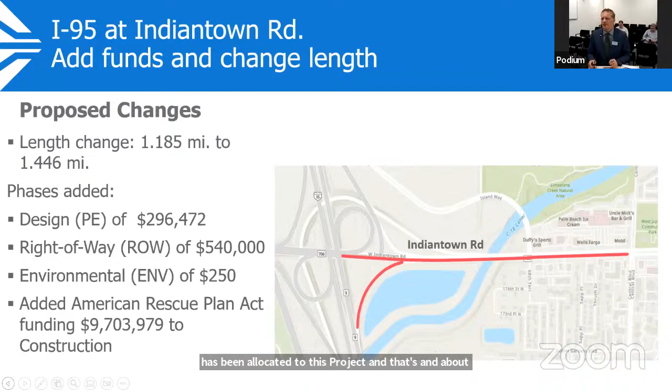In this project, they're adding funds and changing the length of the project. The length change is minor, only 1.18 miles to 1.4 miles. To accommodate this change, as well as the cost estimate increases and inflation mentioned before, they're adding phases: a design phase, a right-of-way phase, and an environmental phase. All of those are incorporated into the next slide, as well as American Rescue Plan Act funding, about $9,700,000.

When we look at the details of the proposed TIP changes, you'll see a slide for each of the 4 projects. The existing TIP shows what it looks like today, currently adopted; the proposed TIP changes are on the bottom. Here, in the highlighted parts for the phases on the left, you'll see the additional design phase, right-of-way phase, and environmental phase. For construction, there's also additional local funding that has increased, as well as the American Rescue Plan Act funding. All of those highlights were on the previous slide, and this is exactly how it will look when formally adopted by our governing board.

The next 3 projects are all resurfacing projects. I'll go over the first: State Route 80 from US 27 to east of Glades Glen Road, out in the Belle Glade area. This one also adds funding and changes the length of the project, from 2.6 miles to 2.16 miles—a shorter segment.

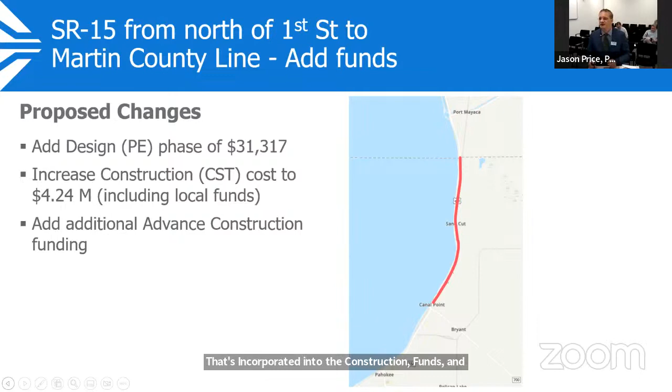This resurfacing project is also out west: State Route 15, from north of First Street to the Palm Beach County/Martin County line, next to Lake Okeechobee. They're adding a design phase for funding and increasing the construction cost to $4.24 million with additional local funds incorporated into the construction funds. Again, these are advanced construction funds—state funds applied to this project. The top shows the existing, the bottom shows the proposed, with additional phases and advanced construction funds increasing the total construction cost.

This is the last of the 3 resurfacing projects, 4 total. They're adding funds and changing the length along State Route 7, north of Southern Boulevard to Okeechobee Boulevard, increasing the construction cost to $2.29 million with additional local funds, plus advanced construction funds from the state. Once again, the existing is on top, the proposed changes are on the bottom, with additional local funds and advanced construction funds increasing the construction funding for the project.

Overall, what we're hearing from Florida DOT is there are cost estimate increases, which we've seen across a lot of projects, as well as inflation. They're finding funds through advanced construction funds or American Rescue Plan Act funds and applying them to these projects because they're coming up for construction in 2023, so they're applying these funds to move them forward to get them constructed next year or in the next fiscal year.

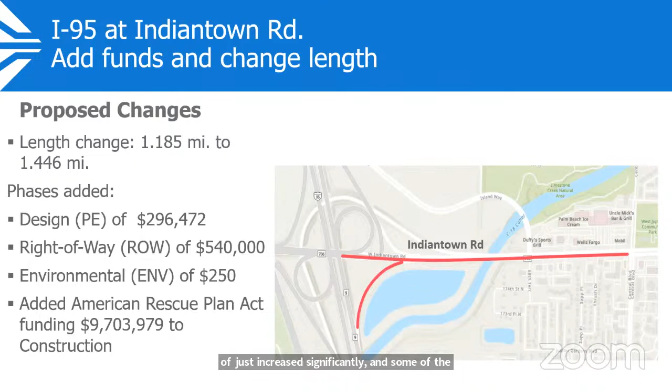And some background from the TAC, from what we heard yesterday morning, the local funds went up significantly as well. Just looking at the local funds, they went up considerably by a couple million dollars. FDOT is asking the locals to come up with a few million dollars, which they don't have.

2.6 million. So we're going to coordinate and work with the project managers, FDOT, the county, and Jupiter to figure out what to do about covering the local cost and how we can accommodate that, either by changing the scope of the project or finding additional funds to keep it whole. But the project isn't going away, it'll still be constructed. We just have to work within the funding that's available, so that's going to be an ongoing discussion between FDOT and the municipality. Okay, thank you.

John, we're going to come back to that, but I want John to go first. Back to the resurfacing projects—a lot of them are changing the length by reducing it, is that to try and bring down the costs? But at the same time, they're adding funds to cover cost increases. Is the reduction to try and bring down the costs, or is it a change in scope?

Or have they just identified that they don't need the full length they originally identified? I would assume so—since they already have full design plans, they know what they're looking to do. But with the cost overruns, the cost estimate increases, and inflation, they may be able to trim a little bit of the length of the project to keep the cost under control, without altering the project significantly enough that it's not effective.

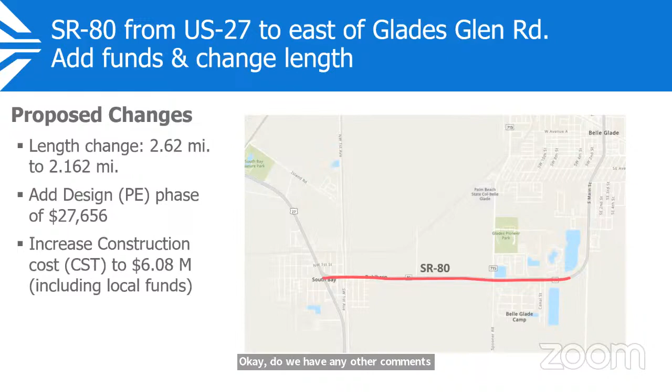Okay, do we have any other comments? Did we do public comment? We already did public comment, you did ask about that. So then, I mean, we're still supportive. We're just trying to wonder about how we're going to pay for stuff as far as the town.

So do we have a motion to approve the amendment to the TIP? I'll make a motion to recommend adoption of amendment number 2. Christian makes the motion, second by Craig. All those in favor say aye. Aye, aye. Those opposed? Nay. Nay, nay—that was Joan and Bruce.

All right, Madam Chair, if you don't mind—Joan, would you be able to provide a reason for your dissenting vote? Sure, I don't have a clear understanding of why those costs have gone up so significantly, and I would need to know that before I voted on anything. Thank you.

All right, with that item dispensed, the next item is the recommended endorsement of the FDOT fiscal year 2024 through 2028 draft tentative work program. Jason and Andrew are going to give a presentation to go over this item.

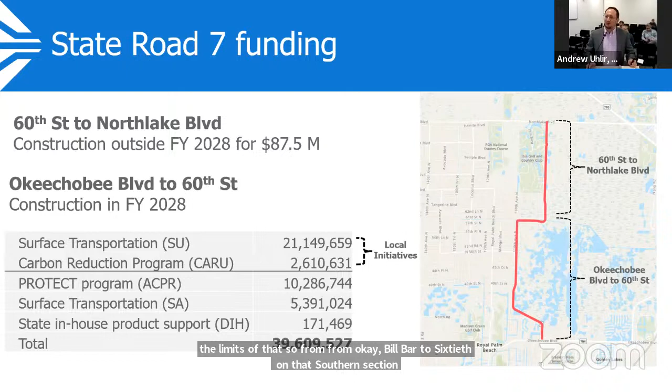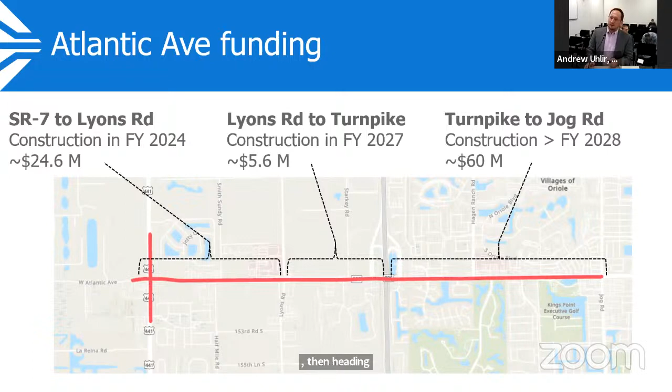Other updates we have for you when it comes to state road modifications, just some small updates. The first is Okeechobee Boulevard — this is the next step in the process. We're finishing up that corridor study now, and you're going to hear today the results of that corridor study the TPA has been doing over the past two years. The next portion is FDOT looking into more of a feasibility study based on those alternatives we provide, scheduled for fiscal year 2025.

Next is another study being completed by FDOT, finishing up soon — that's a US 27 connector roadway from US 27 to State Road 715 out in the Glades area. That was a preliminary study as well. There's additional funding put into the work program in an outer year for some preliminary project development study, but we'll provide more information on the results, and we'll have FDOT come in and give a presentation sometime early next year once they complete that US 27 connector study.

Other minor updates: there's some funding in earlier years for design of a lot of signal projects in our state road modifications program, some small sidewalk improvements, and some lighting improvements on Congress Avenue. All those design phases were able to be shuffled up a bit more and moved one year earlier, into fiscal year 2026.

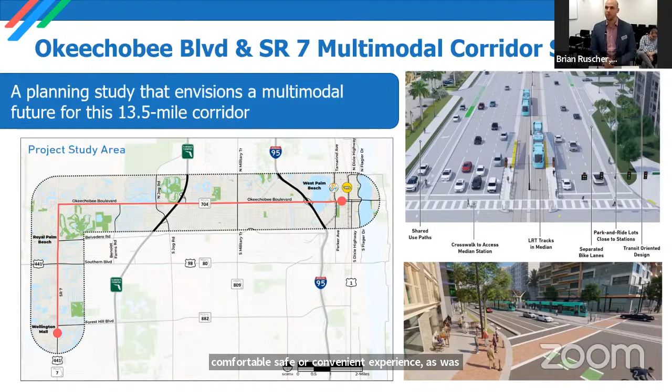As a reminder of the study corridor, this is a 13.5-mile multimodal corridor study, which looks from the Wellington Mall up State Road 7, east on Okeechobee Boulevard all the way into downtown. Multimodal corridor studies focus on how we can improve walking, biking, and transit user conditions and service along these corridors. Using sidewalks, bike lanes, or taking transit along this corridor isn't exactly the most pleasant, comfortable, safe, or convenient experience, as was documented in the study. So this project aims to identify improvements for prioritization in the work program to improve those conditions, so we have a safe, efficient, and connected multimodal corridor system.

As you may know from your experience with the Palm Beach TPA, we are one traveling public across the tri-county area—Miami-Dade, Broward, and Palm Beach County all share populations on a daily basis. We have an expected population growth from 1.4 million to 1.8 million in Palm Beach County alone, based on our 2045 transportation plan. Those numbers are likely low, given the recent population influx due to the COVID pandemic. In the tri-county region, we were projected to go from 5.9 million to 7.5 million. Our long-range transportation plan will get underway early next year, and we'll update these numbers while working with the SEFTC on our regional transportation plan as well.

Returning to our local area, the Palm Beach Transportation Planning Agency, through its 2045 long-range transportation plan and the Palm Transit Development Plan, both identify the 561 corridors listed here in blue. In 2045, these corridors could account for up to 94% of all non-farm jobs and almost 70% of the population within a 2-mile boundary, shown by this blue outline. That means we could provide enhanced transit service through our 561 plan, working with our partners at FDOT, the County, and PalmTran to ensure people have access to a better transportation system for using transit and moving us into the future. I'll let our consultant team kick off the multimodal study goals.

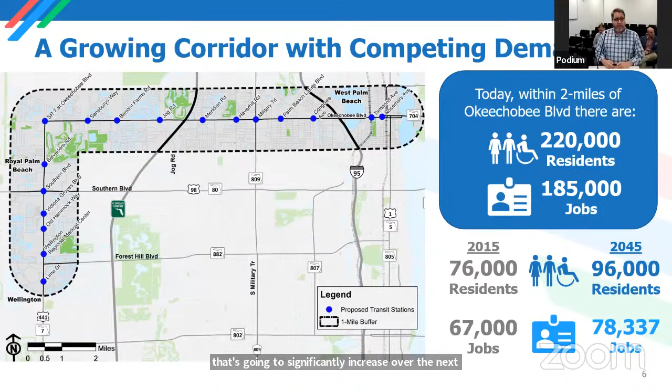So how do we begin to balance that when we're talking about 140,000 people using the corridor each day, and 97% of that are moving with vehicles? As that begins to increase, what are our options for continuing to move that amount of people?

Okeechobee is, for the most part, built out in terms of all the properties along the right of ways having been developed in some form. There's a handful of parcels that are still greenfield, but for the most part it's built out, so the amount of lanes and the size is kind of set to a degree. We have a space that will likely remain the same, but we need to move more people through it.

So when we think about why transit, we think about it as an aspect of trip reliability. We can guarantee through transit that we move more people in the same amount of space, and we can do so in a reliable way. We can also bring reliability to the automobile world by helping to offset impacts at intersections and other things that cause delay in an overall trip.

As we're thinking about the sustainable way to move forward, we want to start to shift the mode balance. We're not talking about cutting out half the cars so everybody takes a bus, we're talking about small percentages. If that 97% could drop by 5 or 6 percent, that's a huge amount of transit in the scheme of things, and it begins to balance out the safety and reliability of that corridor network.

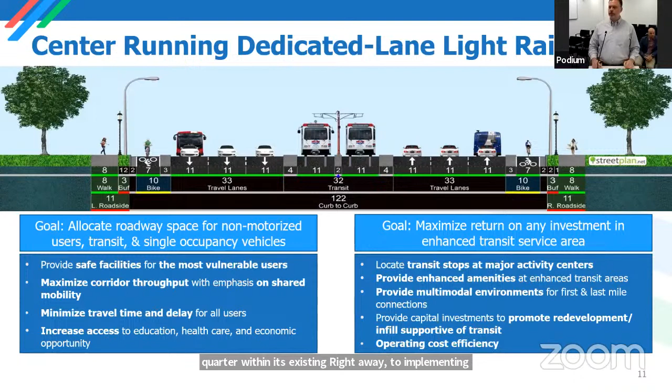What we found, and ultimately what we're looking at for a vision for this corridor, is center running dedicated light rail. What I want you all to focus on in this slide is really the concept, that upper half, looking at how we could transform the corridor within its existing right of way, implementing this vision of light rail transit running in the median and at grade.

Really, why center running dedicated lane LRT? Again, as a vision, it really aligns with those goals and objectives. It speaks to the point of trip reliability, having its own fixed exclusive guideway, improving the travel time from the western portion into downtown West Palm Beach.

It provides those opportunities for improved health and safety. Again, with this fixed investment, a long-term investment, we're looking at not just the fixed guideway itself, but at stations - how do you access, how do you connect. What are those other types of investments that will follow to improve safe access, connectivity, as well as potential redevelopment and economic development through the county, which we heard throughout our public outreach process and engaging with various stakeholders.

And ultimately, it has the capacity to be scalable in terms of how the demand increases or improves once the system is in place. So as a vision, this was the alternative that was recommended.

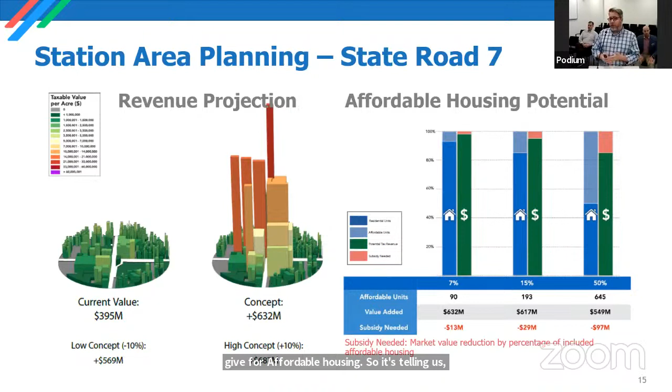What is that difference? You see there's a good ratio between the additional value capture we may get out of future land ad valorem taxes and what we may need to give for affordable housing. So it's telling us there's a really good opportunity here to include a lot of affordable housing, and these developments will help pay for those as they move forward.

First and foremost, the TPA has already programmed transit signal priority and enhanced shelter stations located along Okeechobee Boulevard for existing transit service. This means buses will be able to operate more efficiently to help build the rider base, and those enhanced transit shelters will provide a better and more convenient service for users who either don't have a shelter or need drastic improvements to the existing shelters out there now.

For land use and economic development, we've been working very closely with all of the cities and the county along the corridor to help understand how we can better incorporate these TOD recommendations. As Jonathan mentioned, there are 13 potential station areas with about $10 billion of potential economic ad valorem taxes to be recaptured, which vastly outweighs the cost for operations and capital of any of the alternatives potentially implemented. So we have the option to put in transit through economic development alone.

And then finally, further analyze and refine. As mentioned earlier by Andrew and Jason, who have departed for other work, Okeechobee Boulevard will have a feasibility study of the transit alternatives in the draft tentative work program included for fiscal year 25 to further refine this analysis, which will include a standard FDOT look at the corridor through a transit lens and a multimodal improvement lens.

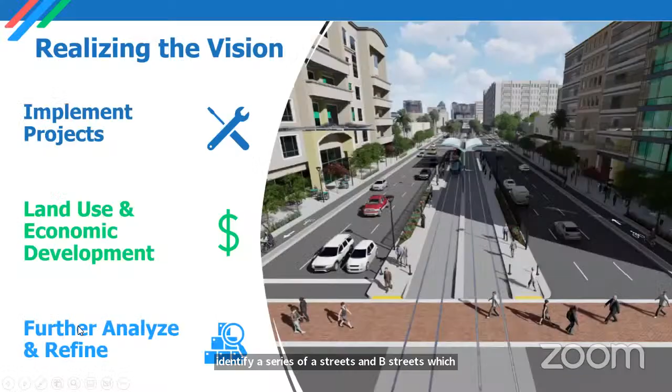We'll get that pulled up. I also wanted to mention that in the analysis, our consultants did identify a series of A streets and B streets, which could contribute to access management at the station areas as well. It looks like Amanda is pulling up the presentation.

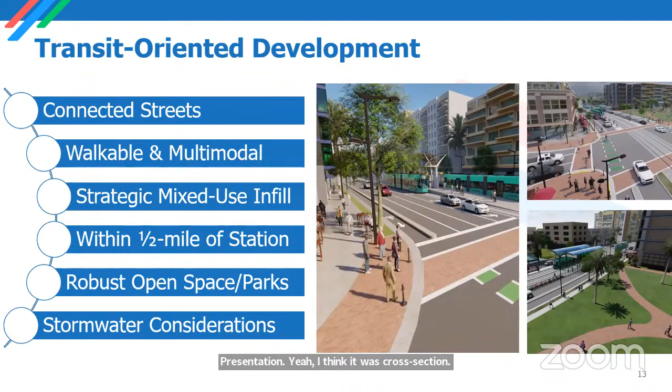Yeah, I think it was the original one. It was a cross section all the way across. It looked like there were 3 lanes on the right and 5 lanes on the left, not counting turn lanes. Keep going, keep going.

Yeah, this one, I think. Okay, so John, or maybe no, this is the next one. Yeah, the rendering, that one. 1, 2.

So, left turn lane. See, this rendering, we're trying to maintain the through movements with still a left turn lane. I swear there was another one that had 5 travel lanes on one side and 3 on the other, but maybe, I don't know. I need glasses, so it could be my issue. I'm trying to squint my way up there.

Specifically to your question, the majority of Okeechobee today has a pretty fat median, and that's where we're gathering a lot of our space for the light rail alignment. For the most part, the left turns that exist today might spatially shift over, but we'd be using a lot of that green median that's out there today.

Where it gets tighter in those areas, we may need to look at certain aspects of lane reduction or narrowing of travel lanes as they are today, or potentially even looking at how to solve that specific intersection arrangement. To Brian's point, part and parcel, I was making the allusion to yin and yang when we looked at some of these plans with the detailed analysis here.

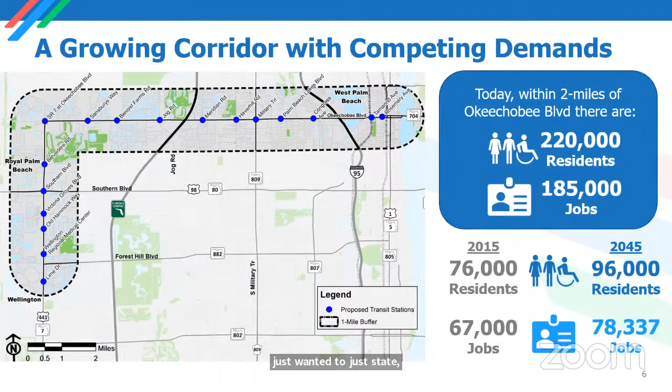That's okay. I just wanted to say this was a really great presentation. It really hit all the points as to the intent, the purpose, and the reason why we're doing this vision, from a long range perspective. I just wanted to state that this is just part of a solution to the long range issue of the overpopulation that's going to end up happening in, let's say, 10, 15, 20 years. I visited Salt Lake City and DC, and I see how this type of corridor mass transit does solve part of the issue of moving people around. So I just wanted to say this is a great vision. I know it's been in the works for a long time. Great job, TPA staff and the Treasure Coast agencies and all the agencies that have been involved. Thank you, Christian.

And I just wanted to note on that comment, you brought up a city. We did look at peer municipalities from around the country with similar demographic conditions, and we projected certain numbers for Palm Beach ridership, but in each of those municipalities, 4 out of 5 scenarios, the transit ridership beat the expected numbers. I think that's important to reflect on, and Wellington's done a really great job incorporating and working with us to get the TOD recommendations in line, especially for the Wellington Mall. Things are very exciting in the Western communities. We presented to Royal Palm, Wellington, and the Western Communities Council, so we're excited to see what you have going on, especially with respect to TOD. Thank you, and Craig?

Yes, thank you for the presentation. I'll say great job on that. It excites me to see a proposal as such that's before us.

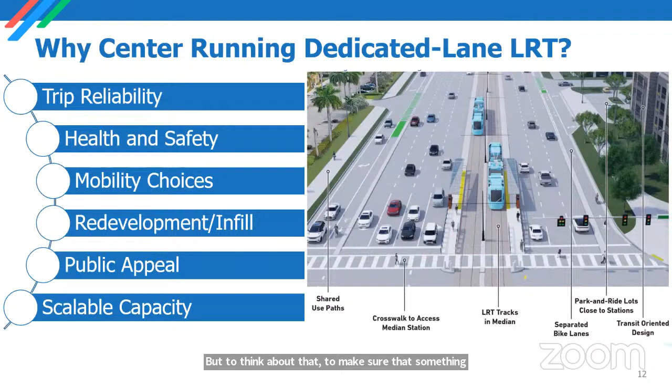I'd like for those to also be considered if they haven't been already. I'm pretty sure it would be part of the plan in the future, but make sure it's thought about so something like this is seen as successful. As a previous transit rider, one thing I didn't want was to think, darn, I wish I had a car so I wouldn't have to walk in the rain or stand in the hot sun.

We actually work really closely with our partners in Miami-Dade County, and Miami-Dade Transit is doing a really great job expanding their smart corridors. They've had very good success both with planning TODs and implementing bus rapid transit corridors, which are future-ready from the perspective of increased number of hot days and increased severe weather events, weatherproofing their stations, while also creating BRT routes convertible in the future to LRT. So we're working very closely with our partners to the south.

Recently we attended Railvolution, now called Impact, and one of the first keynote speakers brought up resiliency of the transit stations currently being built for their light rail lines. So we have the potential - Broward and Miami-Dade County both have transit operational funds for their systems and are working on these types of services now. We're closely behind. We still have work to do, but South Florida will use it. If you build it, they will come.

I'm Craig, just following up on your comment, and Fadi, your comment - the pedestrian experience, that last mile you touched on, I think is really important. What was the thought about putting it in the middle versus putting it on one side or the other? Because then you have the opportunities to co-locate green infrastructure such as stormwater, open space, parks that can be used for multi-purpose reasons.

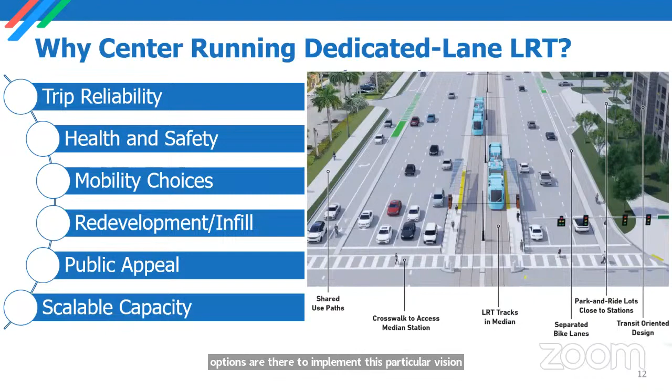Yeah, the one thing I wanted to touch on, back to your green infrastructure point, which is also a great point - in this presentation we're not able to get into all of the thinking that led to what you're seeing here in this quick snippet. For the majority of these stations where we have these green areas, a lot of them are located in the lower elevations because that's where the water is going to come first. So we're working with the land through redevelopment to merge things like stormwater and open space together, so that as this develops, it's developing in a smart, sustainable way.

The other key piece, and John sort of touched on it, is that in a perfect world we'd be able to build this all at once and fix all of these things, with very limited impacts to the community around. But that's not how these projects get built. It happens over time, and in between different phases of development.

So when we look at implementing this in the landforms on Okeechobee today, there's a lot of right turn pockets and business access along that corridor. Something on the BRT or LRT on the sides will disrupt that more frequently than if it's running in the middle. At the same time, we can close that off and create a better urban environment by having B Street access, alley access off of the A streets, converting that. But that's going to happen either through a master developer or through incremental changes over time.

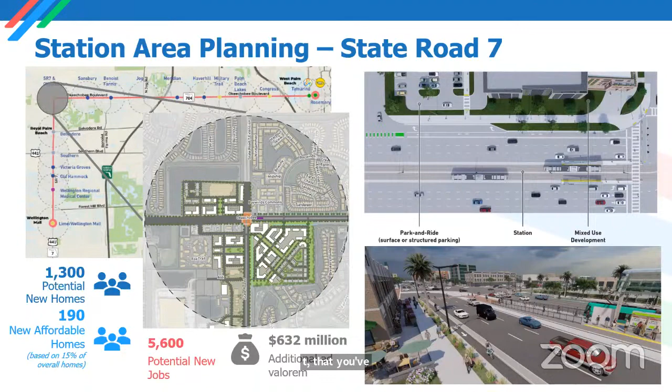Yeah, I wish I had the existing condition up so you could see it more pronounced. But if you look on the outer sections of the corridor, we enhanced it with a multi-use path on each side of the roadway, as well as providing that bicycle lane with some type of separation or buffer from general purpose traffic, folded into the corridor to help enhance that safety for multimodal use.

So those are two. You had mentioned turn lanes and pockets into the business areas. Those are usually a little dicey as far as cyclists and pedestrians. How do you consider enhanced safety factors there?

I'll venture to tell you a story I heard recently from a Palm Beach County water utility engineer who bikes the corridor every day. Westbound is a nightmare for him, especially at Interstate 95. Eastbound, with the recent construction of the buffer between the acceleration lane and the bike lane, has made his experience much more comfortable. So it's a matter of design and factoring in how much appropriate protection and buffer you get as a cyclist before the turn lane starts. That's all in the DOT design manual, and they've done a pretty good job enhancing facilities for bicyclists, but it's only been a start in one location. We'll get more programmed as we move these into the future.

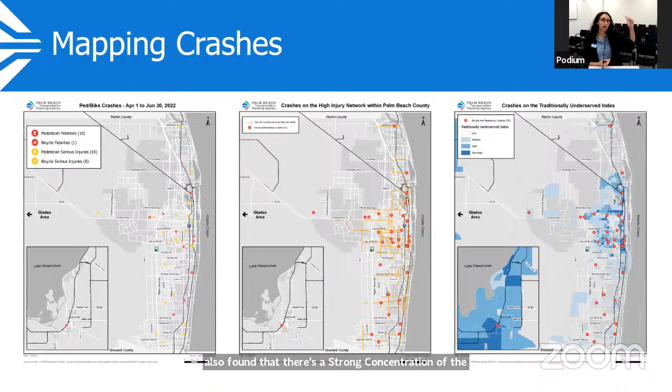We also found that 63% of the crashes were on the TPA's high injury network within Palm Beach County, and that there's a strong concentration of crashes on the traditionally underserved index in the medium to high area within central Palm Beach County.

As I stated previously, we condensed the 5 emphasis areas to 3. For roadway conditions, the circumstances we included are functional classification, number of lanes, and posted speed limit. For human behavior, we included impaired driving, distracted driving, and speeding and aggressive driving. For socioeconomic conditions, we did an analysis including aging drivers and young drivers.

For human behavior, distracted driving remains the highest of all human behavior factors, but lower than quarter 1, similarly with socioeconomic conditions for aging drivers.

Towards the end of the report, you will see TPA reporting, which is essentially what we're using to report on the activities and actions we're taking for our Vision Zero goal.

Some of the activities and actions we took for quarter 2: first, we supported the adoption of the Town of Jupiter's Vision Zero resolution. We also hosted a Vision Zero workshop event to spread knowledge on best practices and funding opportunities, and we participated in Vision Zero trainings to be better equipped in helping communities and local governments reach the goal of 0 fatalities and serious injuries.